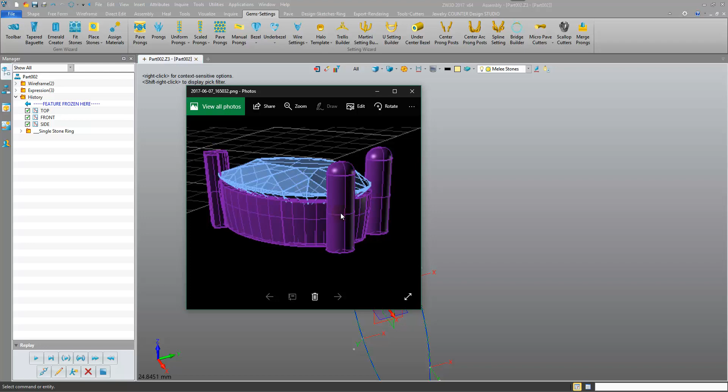Hi everyone, in this brief tutorial we're going to look at how to change the prong shape for our wire settings. So something like this, we have our round prongs here, and then we have this different shape prong here. How do we go about doing this in a quick way with our current wire setting?

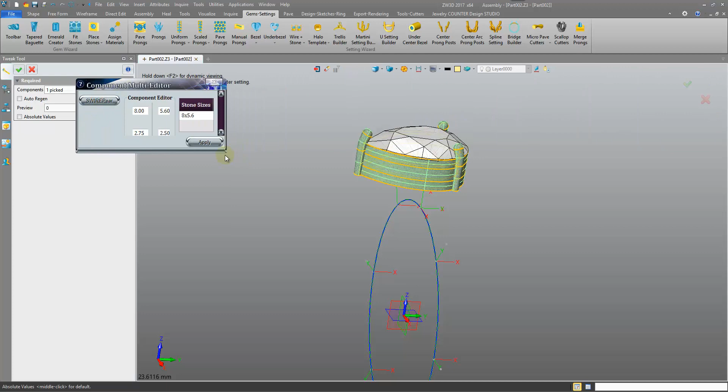It's actually quite simple. I'm just going to place a wire setting on this pear that I have. I'll do the wire plus stone, and we're going to drop that on there. I'll confirm here and update some of the parameters in the tweak command, so activate that.

We'll thicken up on these, just thinking about keeping these ones the way we like, since we will be changing this profile out here. So typically I like to bring the bezel length below girdle down slightly, and we'll thicken up on these, maybe make them 1.25mm at the top, 1mm at the bottom, our prongs.

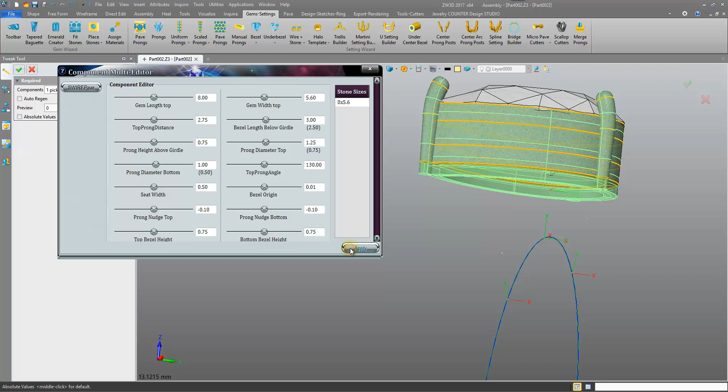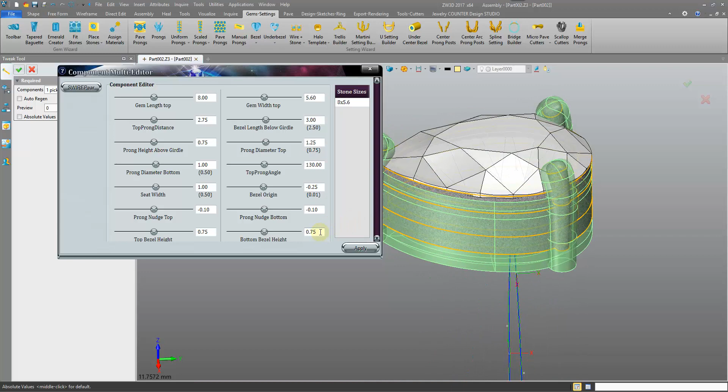I'm going to just give it a slight negative elevation of the girdle there. Seat width, I like to make this 1mm, a good amount of material there. And the rest I'm happy with.

I may take out the bend, I think that's - where's the bend? Down here, so I'm going to take out the bend. Let's go for a 0. And prong height above girdle, increase it 1mm. There we go.

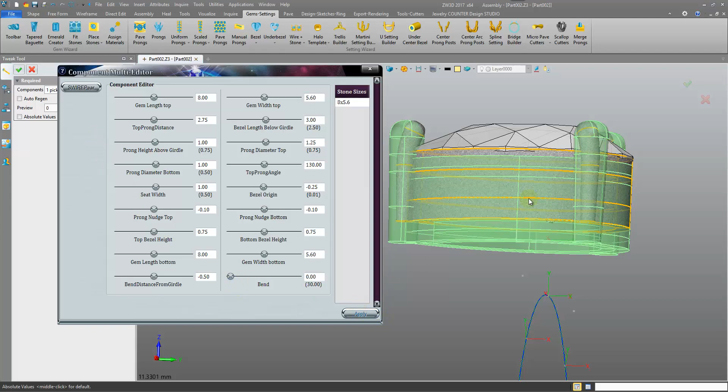And we're going to give this a taper by reducing our bottom gem lengths and widths. Okay, these are currently the same as the top, so we're going to have straight sides. If we reduce this, something like this, we're going to be having a taper.

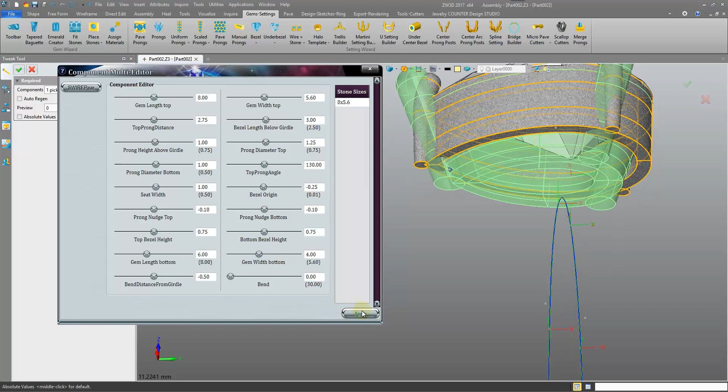Yeah, it's a pretty heavy taper. There we go, just a slight one.

Okay, so we've created our wire setting the way we want it with these prongs. Now we just need to switch out this one, and it's easy to do. We just edit the component.

We right click on the component. You may have to set your entity filter to component, or if you do it with the entity filter set to all, it will naturally select it as a component. We right click and select this icon, edit part.

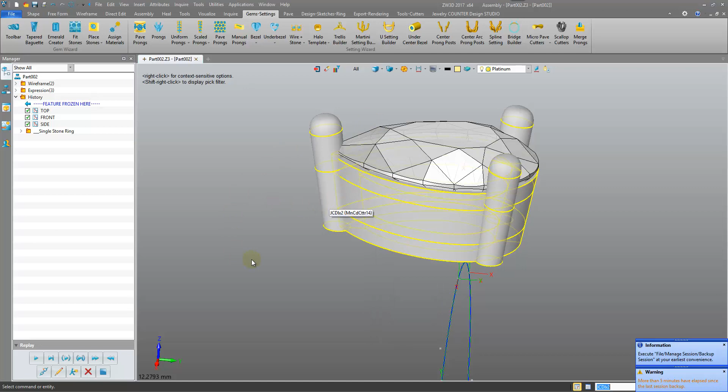And then we'll edit the history of the component. In previous versions of the software, we were able to just double click and enter into the history, but in this case we can't. We have to right click, edit - right click, modify, or edit part.

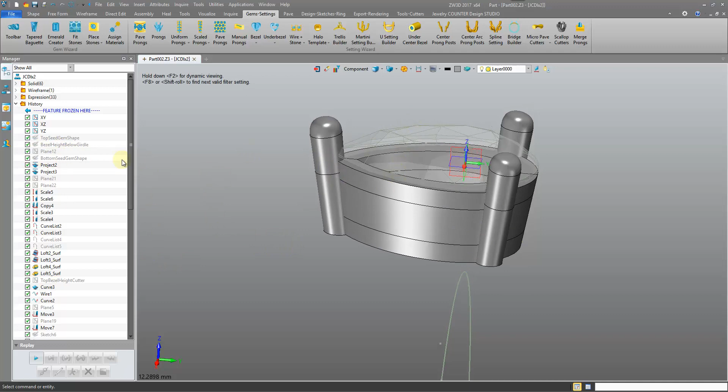Okay, so now we're in the history of this wire setting. We can see how it's built. If you move the model stop up to the top, we can see how it is built. We're just going to use this to change out our prong at the head there.

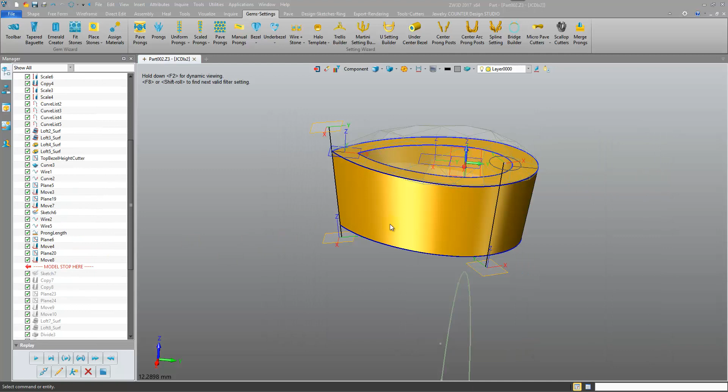We're going to give it a different profile, and it's very simple. We just need to change the profile that is swept along this line. You may wish to step through the history and just take a look at how this wire setting is built, and it will give you a good understanding of how you can make customizations.

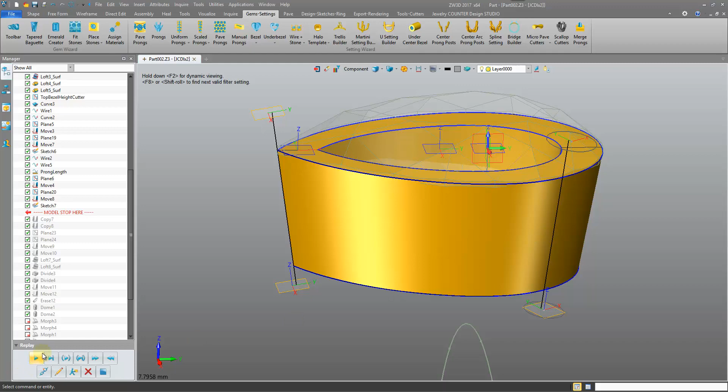But essentially we are sweeping a profile along, or doing a drive curve loft of two profiles along this curve. And you'll see that this sketch - well, not this sketch quite yet, we're still working on the round prongs. We'll play it through, there we go.

So in fact we did a copy there. There was a copy of this profile onto there. So I'm copying this profile onto here and this profile onto here.

I don't need either of them, so I'm going to delete them. I'm just going to do delete next operation. So we no longer have the copy. We're just going to place our own profile there. We're going to come into the Design-Sketcher-Ring tab.

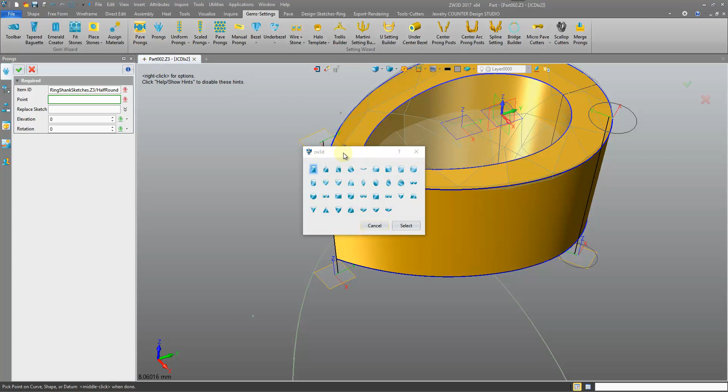I take that back, it will be in the gems and settings. We have some prong sketches. If we come into this prongs tab, we have a whole bunch of different sketches we can use for the prongs, and you'll see that we have one that quite closely matches this prong here, and we're going to go for this one.

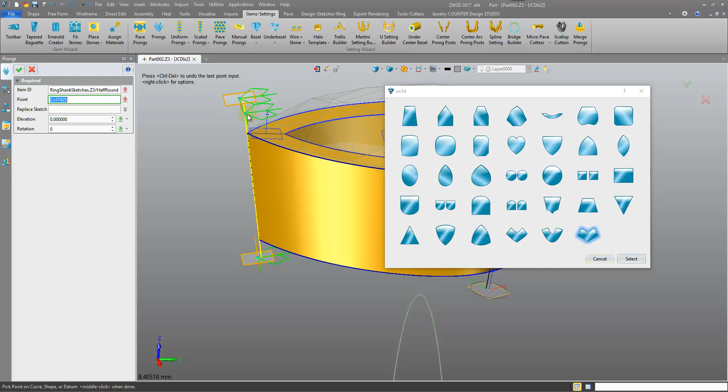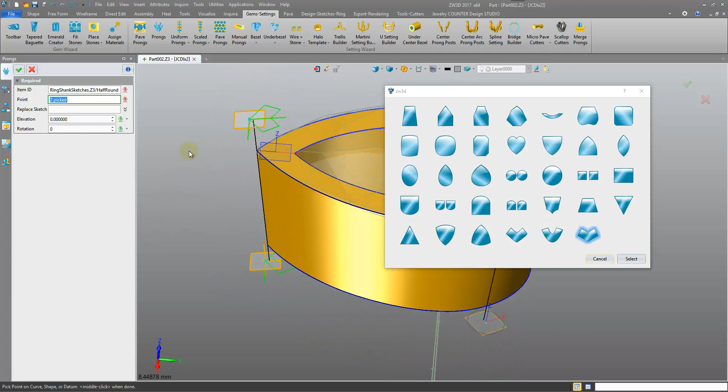So I'm just going to place these on these sketches here, and you may wish to do a sweep with a linear scale to get the taper in the actual prong, because here we had the 1.25mm at the top, 1mm at the bottom. I don't think it'd be quite so easy to assign that parameter to this shape since we have many more dimensions. So in fact, if I unpick that, I'm just going to be sweeping this with a linear scale to get that taper in the prong.

So I just need one profile. Let's play it through until these lofts start taking place. So we'll play the planes, we have these moves, and okay, so the first loft clearly is this one, and it's going to fail because we've deleted those sketches.

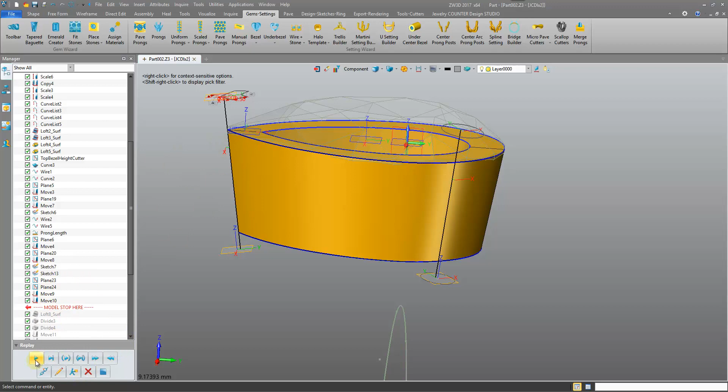So we're going to get rid of that loft operation as well. I just deleted that loft. We'll play this one, the next loft, and it should be this one. It should play fine, and it does. Okay, so we just need to sweep now this sketch along this curve, and we'll do the linear scale.

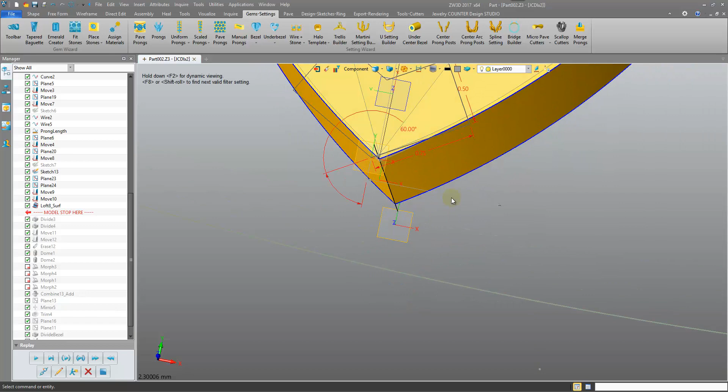First of all, we're going to want to update our parameters. Okay, I think I want to add some material here, make this a bit thicker at the top, so I'm going to change my filter into dimension, and why don't we come into a top view? It might give us a better angle. I mean, it's not bad.

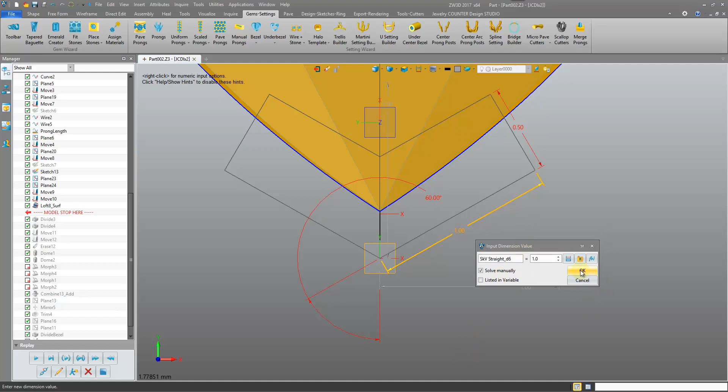Let's make this 1mm. I'm going to change my step size to 0.05. I'll take off solve manually just so I can see the sketch move. I like to do this so I can see it move, and then I just place it back on, press OK, and it's going to stay there without regenerating the history.

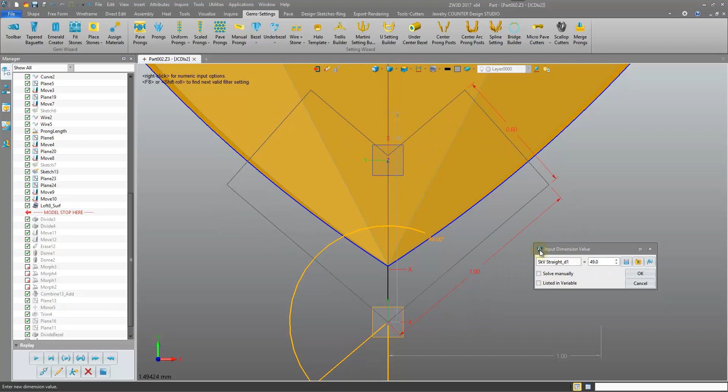Okay, so now I'm going to change maybe this to take off the solve manually, change it again, you see it moving. 0.6, that seems fine. And I'm going to tighten up on this, make it a similar angle to that of the point of our pear here. So take off solve manually and move it, something like that. And I'm happy with these parameters now.

Well, no, I'm going to move it out a bit. I'm going to come to a top view again, check solve manually, and we're going to modify this parameter now. So, okay, it's not moving for me. So this dimension isn't going to work for us.

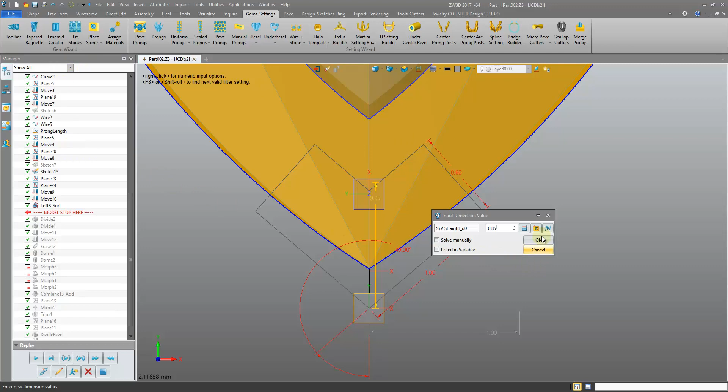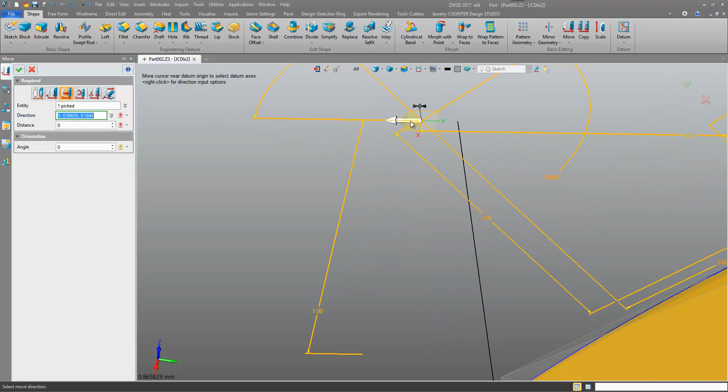I'll just have to move it, force move it with a move command. So I'm going to confirm here with the solve manually unchecked, and our history will regenerate and these dimensions will become permanent. Okay, so now I just need to move it, shape, move the sketch, and I could just do it like this, but I like a bit more precision, so I'll use my third move along direction, pick the direction along the Y or negative Y of the datum plane the sketch is on, and I'm just going to tweak it out. Let's go for a nice number, 0.6.

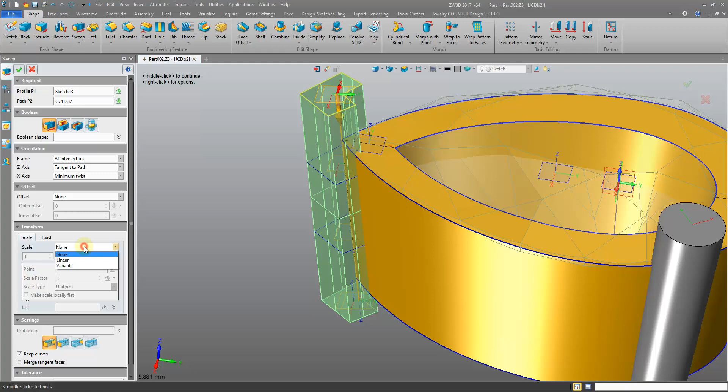Okay, and then we're going to come in with our sweep, shape, here we go, sweep, pick the profile, pick the path that's already there, and like I said, I want to add that linear scale. So in this transform box we have scale, linear, and we'll scale it 0.75. I mean, that's not too far off from the scale we have here. Maybe 0.8 is a bit more accurate.

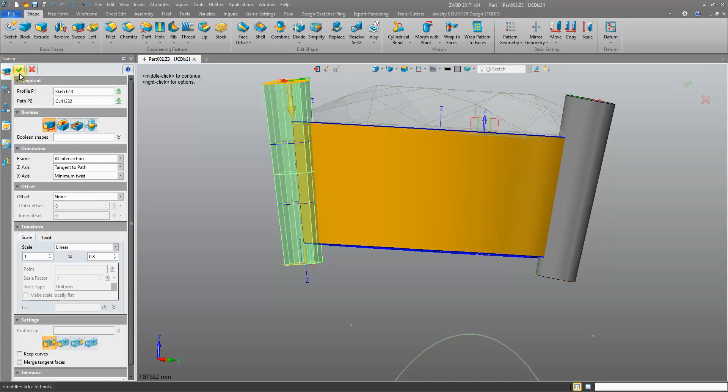Okay, so we can maybe uncheck keep curves, I don't think we need them. And we should be able to just replay the rest of history. We may have to do a bit of repicking with this shape, so let's see how we go.

Okay, so it got stuck on this divide. I'm going to edit it. Just need to pick this prong, and it's splitting it to allow for the bend. Even though I had the bend at 0, we'll still update it just in case we want to add that in.

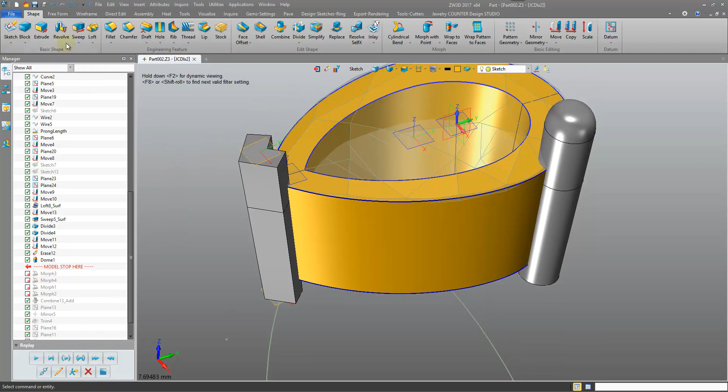There's a dome on here, and I don't want to add the dome there, so I'm just going to delete this dome. If I wanted to, I could place, for example, a fillet. Let's come into the loop fillet, 0.1, pick it all, increase this. There we go, we have a rounded top.

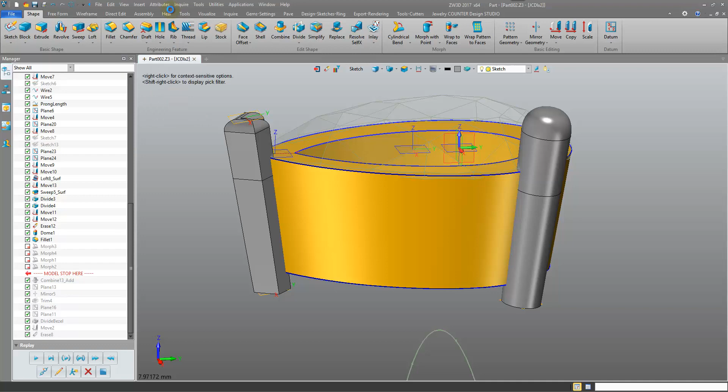Try and replay these morphs. Okay, some will fail. Well, I just want to make sure that they are okay. Well, they're all suppressed anyway because of our attributes having a 0 bend. So let's just increase this number to 10, and we'll probably have to link these up. Well, I take that back, it's actually stayed linked nicely, so no bend is necessary, no linkage is necessary. Let's set that back to 0.

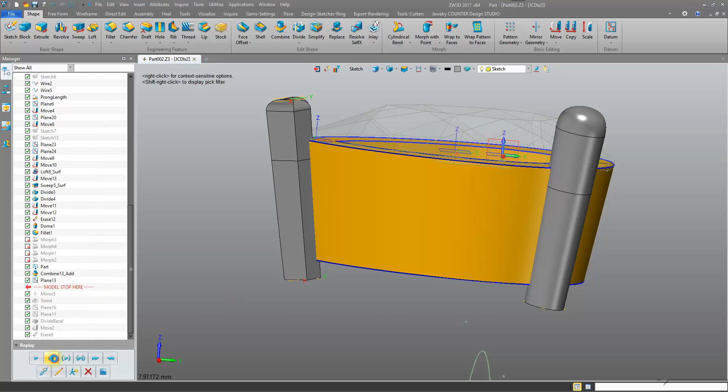And replay all. Okay, it's getting stuck at a trim. Edit the trim. It's just going to be picking this shape. And it looks like we need to combine these together, doing a combine add.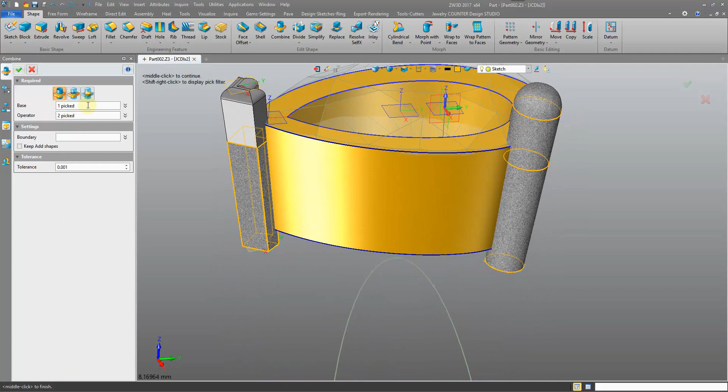So let's undo that, come back to the combine add. Edit it. And we're picking this one. Okay, so we have a complete shape there.

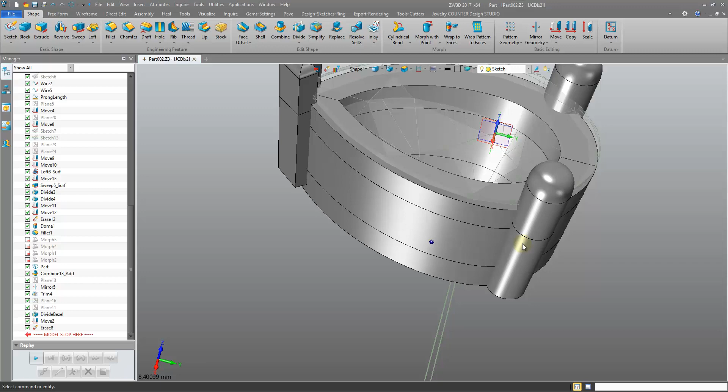And replay, redefine the trim, pick our shape, replay the planes, and that is it. We have our changed Y setting. We can now exit back into our main part level.

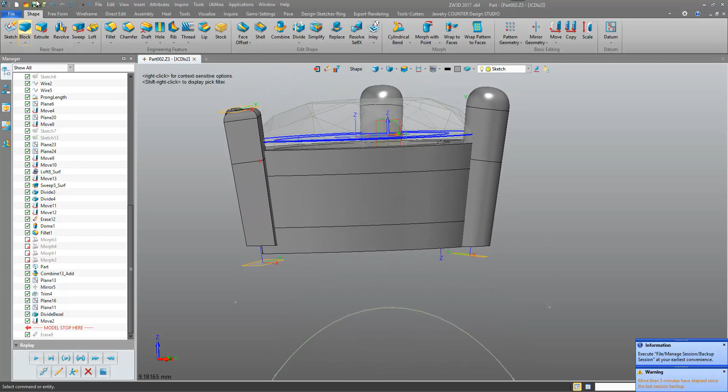Okay, I'm noticing that the trim is bad there, so let's see what's going on with that before we move on. That's fine. Okay, so it looks like this move. We need to edit the move and pick that shape as well. There we go. Okay, I'll exit back into the main part.

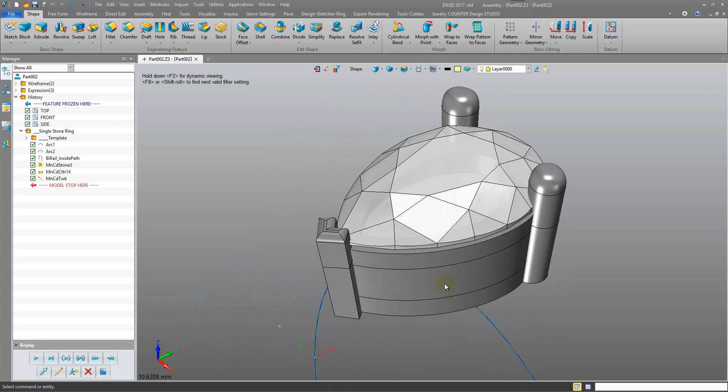Here is our bezel. Y setting. I'm going to save it here. Save it as this part 02, and we're going to look at something. Okay, so when we have created this, we'll see it in our root area.

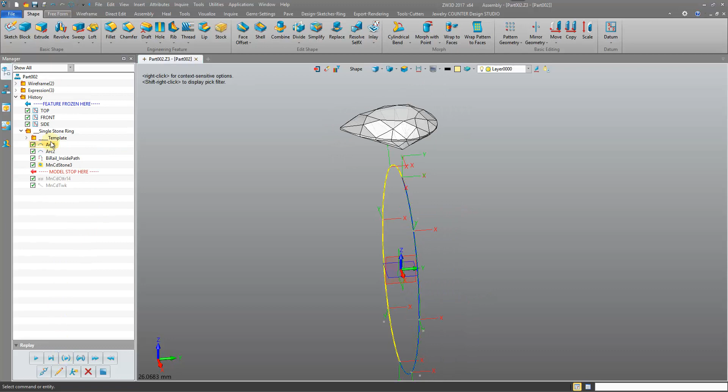Okay, there it is. This is the halo. Sorry, not the halo, the Y setting that we've created. Okay, now sometimes when you regenerate the history, or perhaps replay an operation, say this Y setting, confirm.

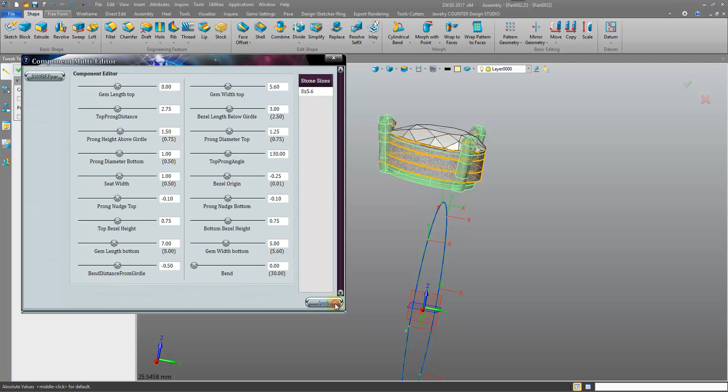Okay, you see, even though we tweak it, well, magically the tweak turned it back into this one. But if we were to edit the tweak, let's see if I am going to eat my words here. Let's say we make the prong height above go 1.5, and confirm, and regenerate. Okay, so when we tweaked something, it caused us to lose our modified Y setting.

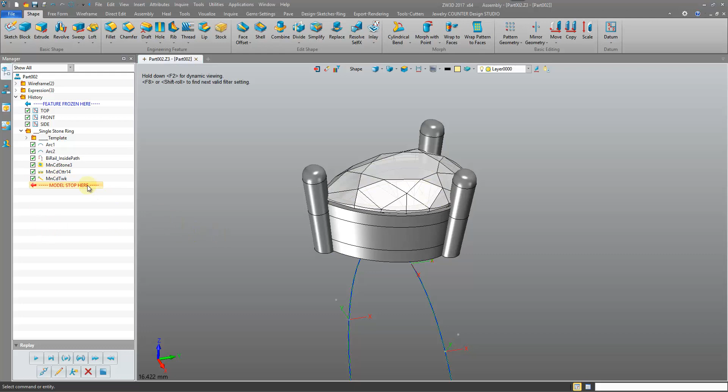Okay, so if that happens, if you do need to tweak it, then you don't have to recreate the Y setting, you just have to reinsert it from your root environment as a component. So actually what you can do here is delete both of these operations, right click, insert component.

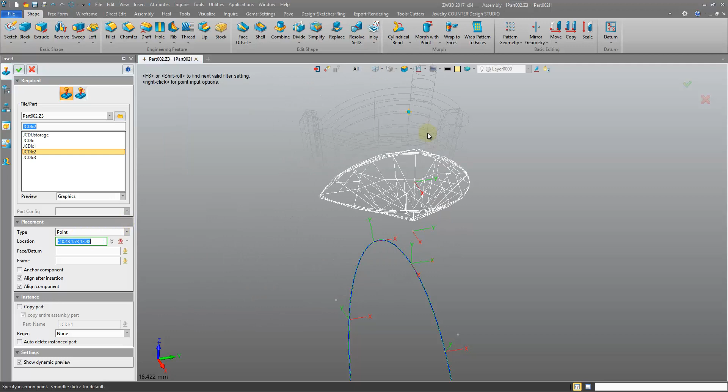Let's turn on the graphic preview. We know it's this one, right? Yep. You can rename this if you want to. We're going to insert this on the datum plane that we placed the stone on.

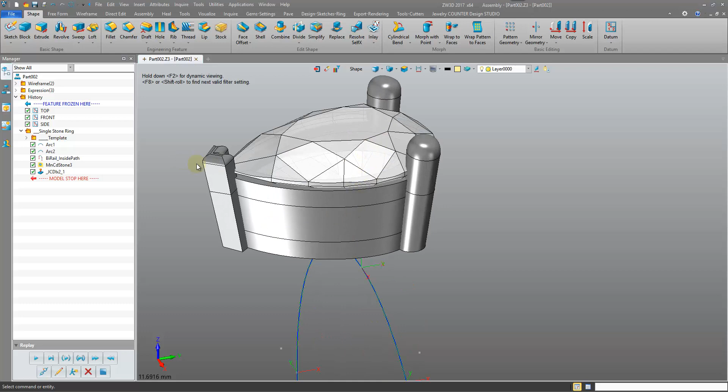Okay, so now this is referenced directly from our root level, so it's linked directly up to this part, okay, with this history. So it's referenced directly, and no matter what regenerating we do, we could even apply tweaks to this. It doesn't matter, since it's referenced directly from our own root level, then we're going to always end up with our modified result. And you may wish to save this part as your own custom part and be able to insert it into any build. Okay, so that's how we can create the different prong.